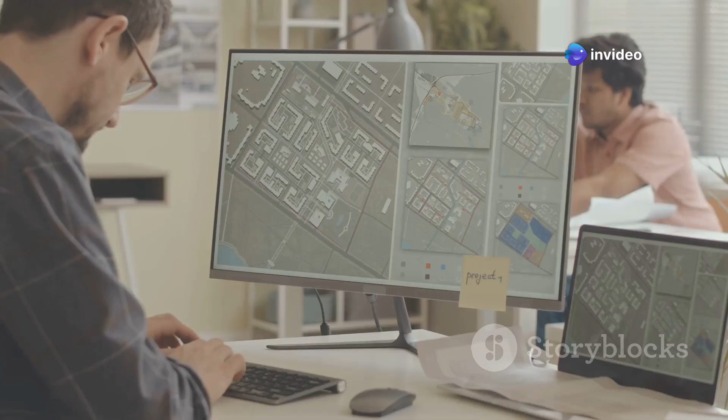Yet many organizations are faced with persistent issues like how to best plan for 100% wireless coverage, how to correct for spotty wireless coverage, how to fix the problem of wireless devices locking up, how to fix the problem where sessions drop or freeze when wireless client devices move around, how to know that the wireless security is truly working as intended, and how to identify and avoid wireless interference.

It is done with special equipment and sophisticated software, but it requires skill and experience. Network support professionals have 25 years of experience with wireless networking, and we understand it well. We provide organizations the vital data in language they can understand, so informed decisions can be made.

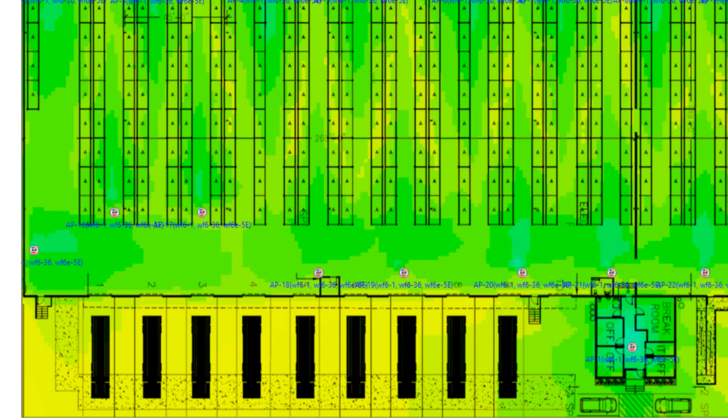We take a practical approach to wireless site surveys and provide just what is needed without charging for reports with a lot of fluff.

We understand and support both autonomous or standalone APs and controller-based wireless implementations, and it does not matter which manufacturer is deployed.

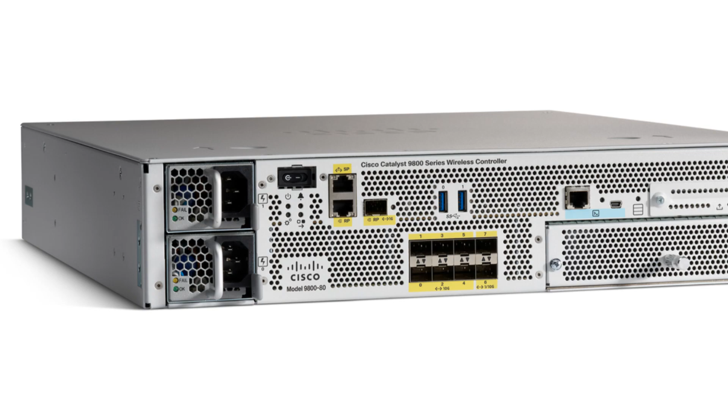Network support professionals specializes in Cisco Enterprise, Cisco Meraki, HPE Aruba, and Cambium. But our wireless survey, design, and troubleshooting services are vendor agnostic. So if Ubiquiti or some other brand is deployed, it does not matter.

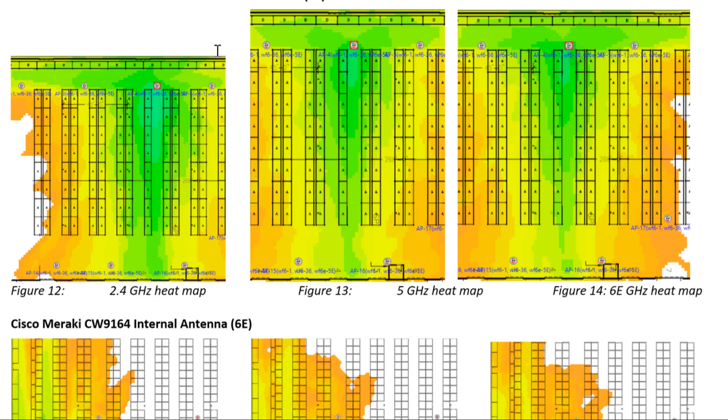Let's talk about those persistent issues. If an organization needs a design for 100% coverage, there are two good options. The first and least costly option is to get a predictive site survey.

This can be done without going to the site. The predictive survey starts with creating a virtual representation of the facility. Characteristics like ceiling height, signal loss through walls and racking, antenna radiation patterns, and other physical features are created. Different access point placements and model selections are simulated so coverage can be accurately predicted.

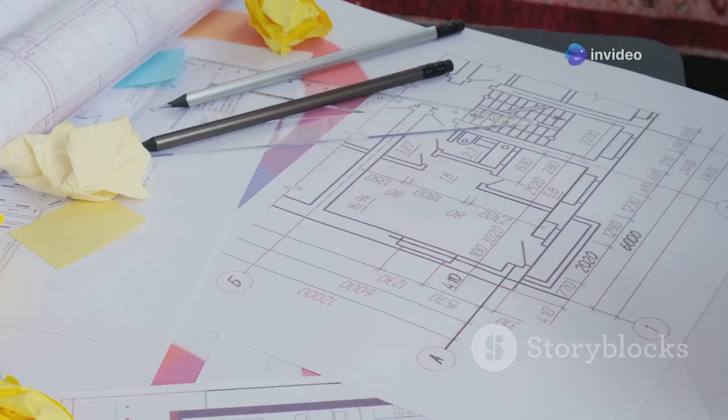As long as you have either good architectural drawings or reasonably good drawings that include sufficient detail and are drawn to scale, then you are good. We will work closely with IT to make certain we know what is important for coverage, and we will ask for some photos to make sure we understand the environment.

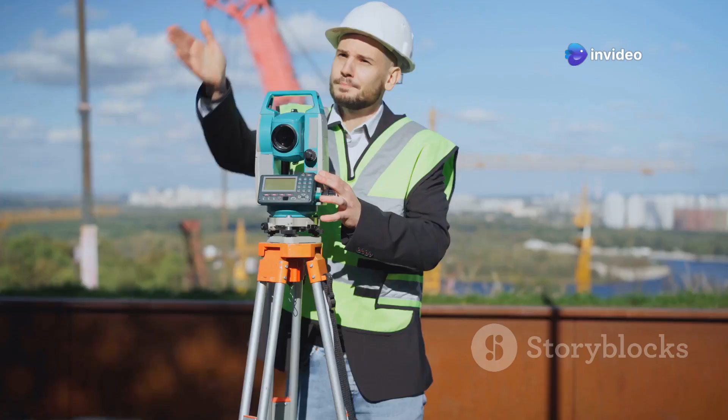A nice report will be provided including heat maps, recommended access point or antenna placement, and installer instructions for deployment. The second option costs more, but will provide the most accurate design. That would be an on-site wireless survey.

Here, an engineer from Network Support Professionals makes a visit to the site. Wireless access points and various antennas are used to get precise measurements for the most efficient design.

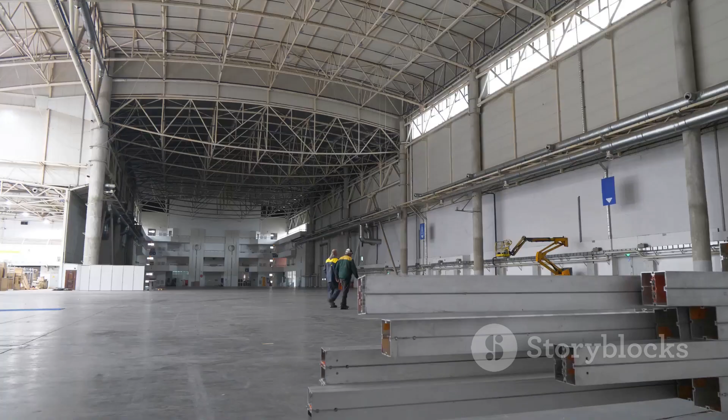The on-site wireless survey is particularly beneficial in complex environments such as manufacturing or distribution centers with lots of racking or unusual configurations. Most warehouse facilities between 60 to 90,000 square feet can be surveyed in one day.

Within a few days, a wireless survey report will be provided that will include everything needed to achieve 100% coverage, along with specific installer instructions in case the organization is handling the deployment.

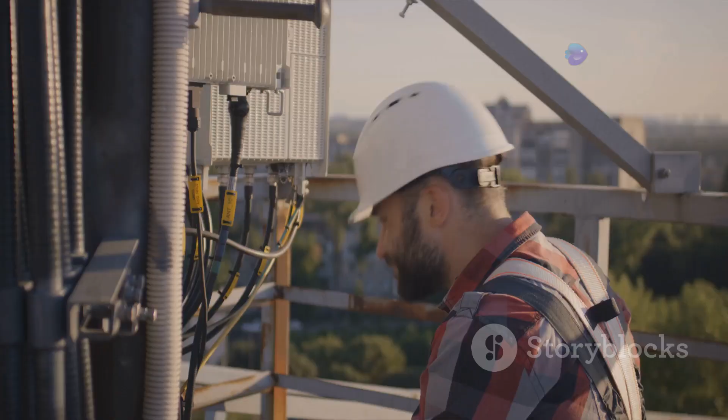Network support professionals can provide a turnkey deployment for the new wireless design, including cabling of copper and fiber, cabinet installation for MDF or IDFs, and mounting the access points with antennas. We are accustomed to working closely with IT or operations to ensure a smooth implementation.

Our teams have traveled all across the US doing just this type of work.

So, what if your problem is spotty coverage? Network support professionals will come on site. We typically talk with the warehouse manager and key people on the floor to make certain we understand the full scope of their problems. We will survey some or all of the facility depending on the scope of the problem reported.

While we are still on site, we will analyze our findings if possible. If we find actionable problems that can be corrected by changing some configurations, we will make those recommendations to IT. If the organization's IT is able to make the changes right away, we will resurvey the related areas to validate those changes. Many times, this method has been successful.

Several wireless problems can cause client devices to lock up or drop sessions. We have the tools that allow us to see not only what the access points are doing, but we can also see the details of client devices in real time, so we can pinpoint the source of the pain.

We can tell for certain if moving client device session drops or freezing are happening because the controller is not handling roaming appropriately, and we can provide the recommendations to fix it.